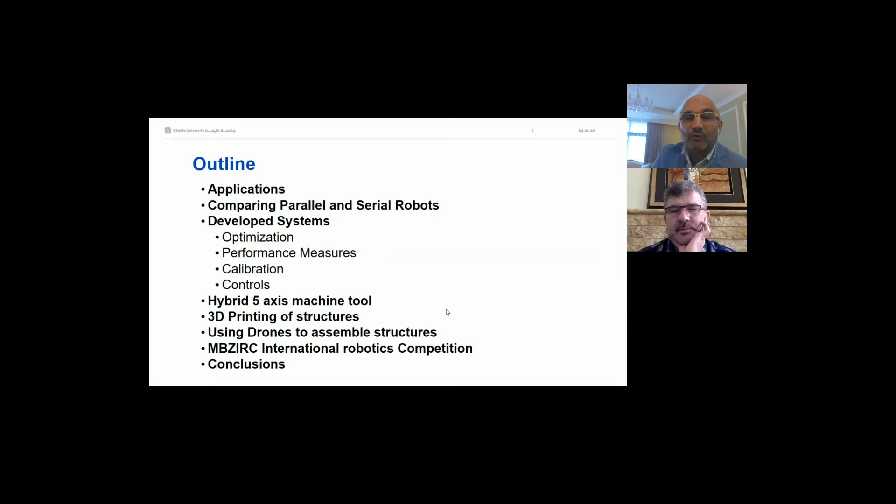The outline of the talk: I'll briefly touch on the applications of robotics, and I would like to compare the pillars of robotics, the parallel and serial robots. I'll talk about the methodology of developing robotic systems, then give a number of examples of research that my group is doing, and also a brief on the Mohammed bin Zayed International Robotics Competition, to encourage you to be part of our future competition, because it's highly popular and it could help you grow very much. Then I'll conclude with some points.

Robotics applications stem from so many fields, from surgery to logistics to security. It became very popular even as a household product, for vacuum cleaning, for example, or window cleaning. So it's being popularized at a very high rate in so many areas.

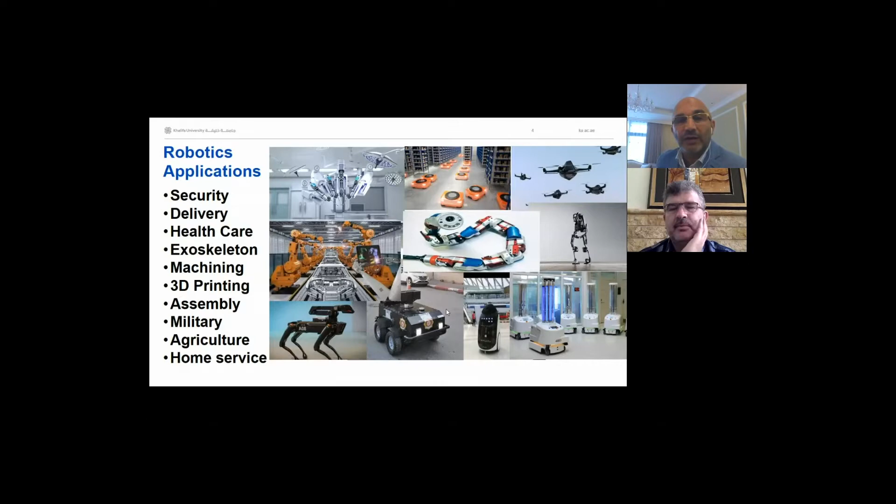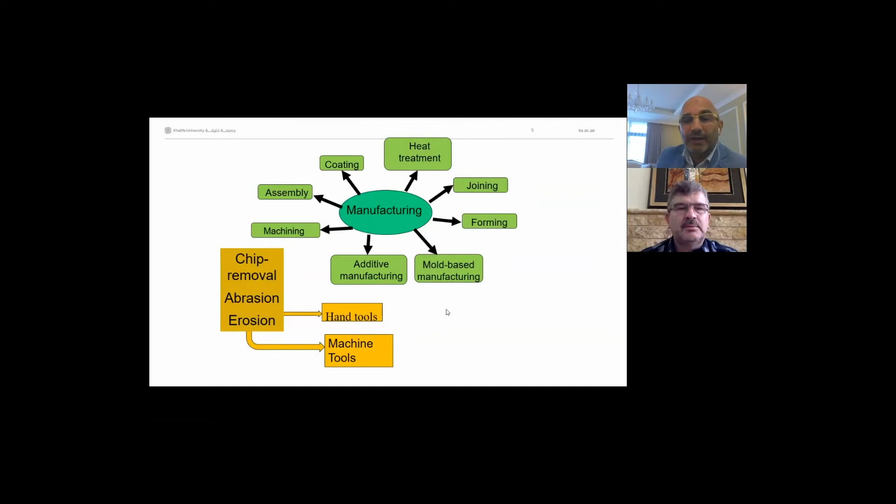One of them is industry, particularly manufacturing, which is the area I'm focusing on. In terms of manufacturing, there are a large number of applications: assembly, machining, manufacturing, etc. My work is mostly focused on developing robotic systems for machining applications, like CNC machines, computer numerically controlled machines, and additive manufacturing, where you 3D print structures. I'll show an example of that.

Many of us are familiar with the example on the left, the serial robot, where basically links are connected serially to each other. My focus is more on the system on the right, which is parallel kinematics, or a hybrid system, which combines the advantages of both.

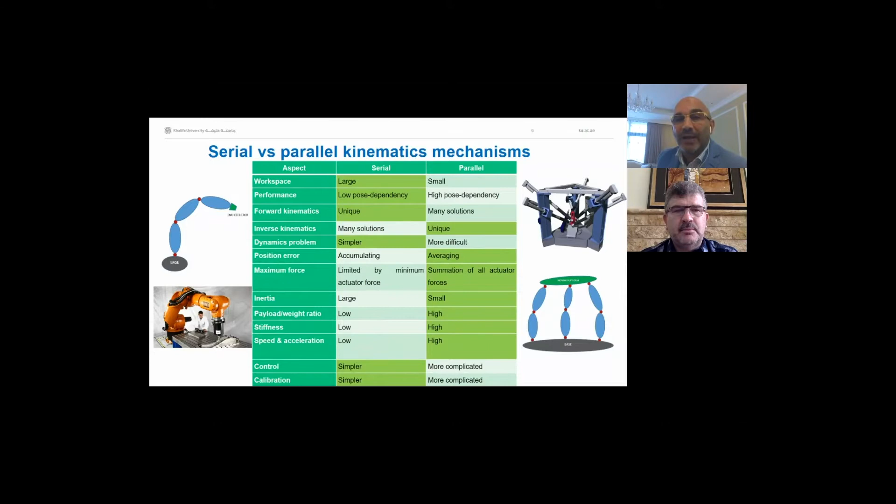Here I'm comparing the advantages and disadvantages of serial and parallel robots. For example, the workspace for serial robots, traditional robots, is quite large, while for parallel robots it's quite small. However, you have very high stiffness and very high accuracy. So the best thing is to combine parallel and serial to come up with a new breed of robotic system that marries the advantages of both.

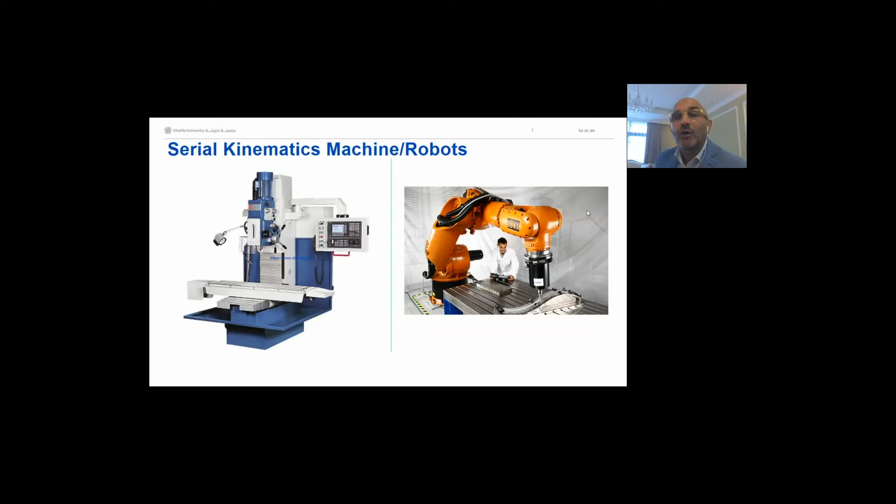This is what we are doing in many of our developments. For example, the one on the left is a serial CNC machine, the traditional CNC machine, and the one on the right is a robotic serial system, of course.

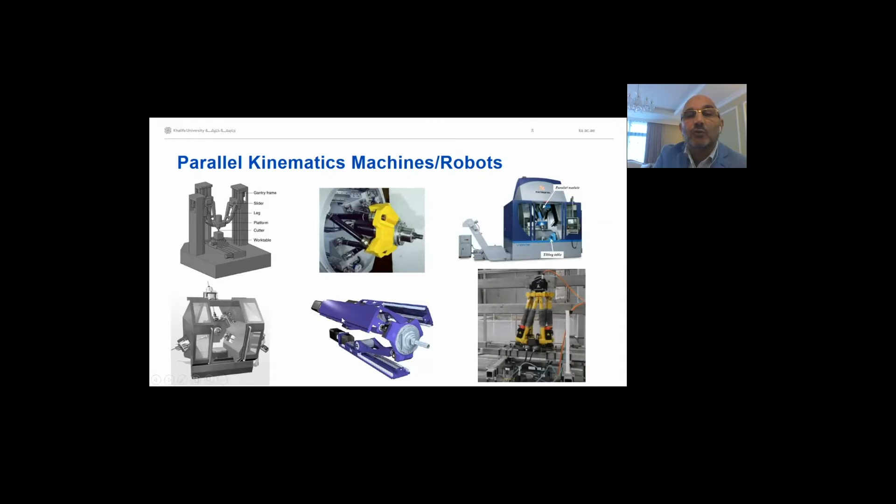Here it shows parallel kinematic robotic systems, different examples from the industry, from the hexapod, the one in the center top here, that has 6 degrees of freedom, to some spindle control here that has only 3 degrees of freedom, for example. The hybrid kinematic machines are finding more and more usage in the industry.

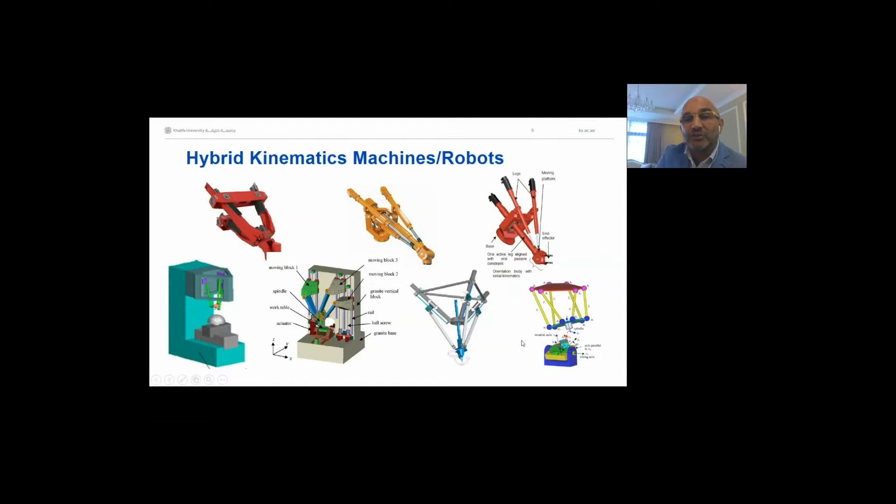The Tricept at the top here with different variations, and basically a number of hybrid kinematic machines in the bottom part of this screen.

So roadmap to conceptualize new machines, how we go about doing that. The way we do it is we synthesize the structure, determine how many degrees of freedom we need for our application, and based on that, try to identify and enumerate what types of mechanisms are there that will satisfy these degrees of freedom.

Then we formulate the pose kinematics and differential kinematics for these new concepts, based on a number of performance measures I'll show in a minute, for example workspace, stiffness, accuracy. Based on that, we'll evaluate these different competing mechanisms.

Then we'll go through an optimization process to optimize the geometric dimensions of the mechanism that we'd like to fabricate and prototype. Then we'll start the prototyping process.

And then we go through the identification of dynamic parameters, because however hard you try to make sure your dynamic parameters are accurate, it's difficult to be exact in computing the inertia or mass of the different fabricated components. So we need to resort to experimental work, such as impact hammer tests or similar tests, to identify different dynamic parameters.

Then we'll go through the phase of control design, tailoring the control algorithm based on the application, and to get the maximum out of the mechanism we are building, we need to calibrate the system in order to give you the accuracy that you anticipated.

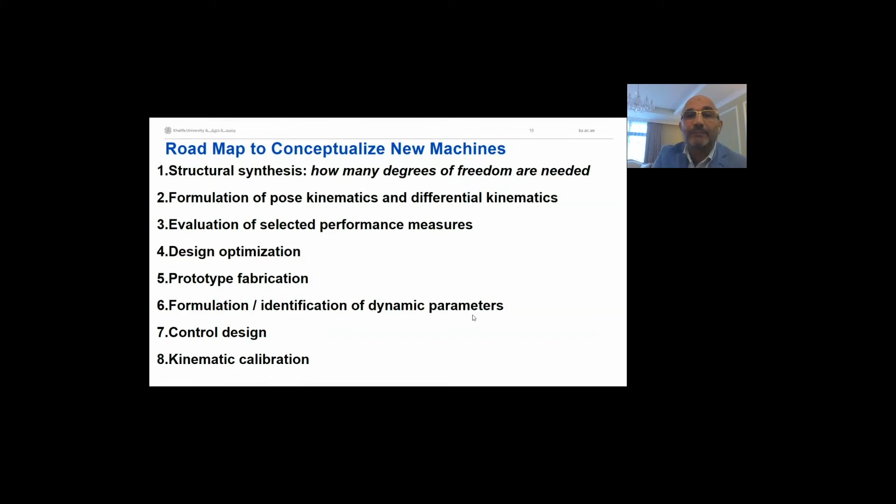The performance measures could be the accuracy of these mechanisms, repeatability, and the stiffness—especially if we are talking about machining, stiffness becomes very important. Manipulability is also key, basically the range of motions that we have for this mechanism.

Singularity avoidance is another issue. In serial robots, singularity means you lose a degree of freedom—for example, if all the links are aligned with each other, you cannot move along that aligned direction, so that's a loss of degree of freedom. However, in parallel kinematics, it's the gain of a degree of freedom. For example, if some of the legs become parallel, the whole platform will start moving without any control, so you have to ensure you don't go through singularity for such a mechanism.

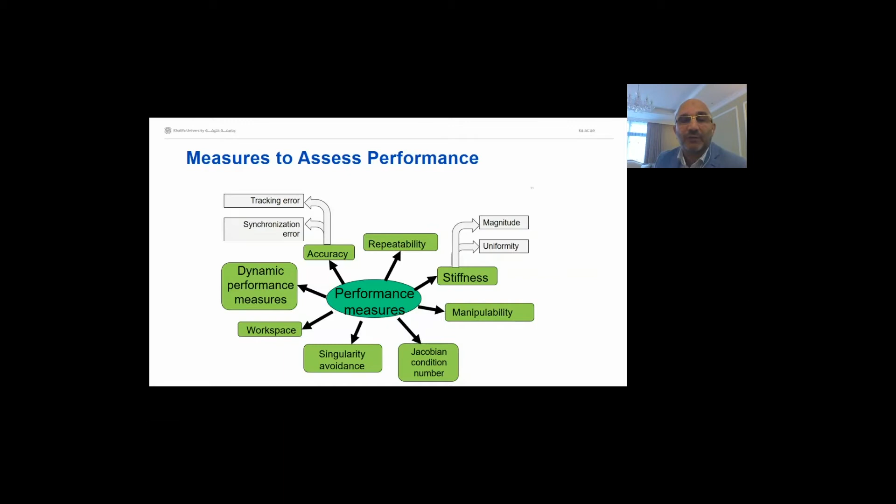Also, there are issues of sizing of the workspace, because you need to buy a machine, but it's justifiable to have a reasonably sized workspace for any machine that you have.

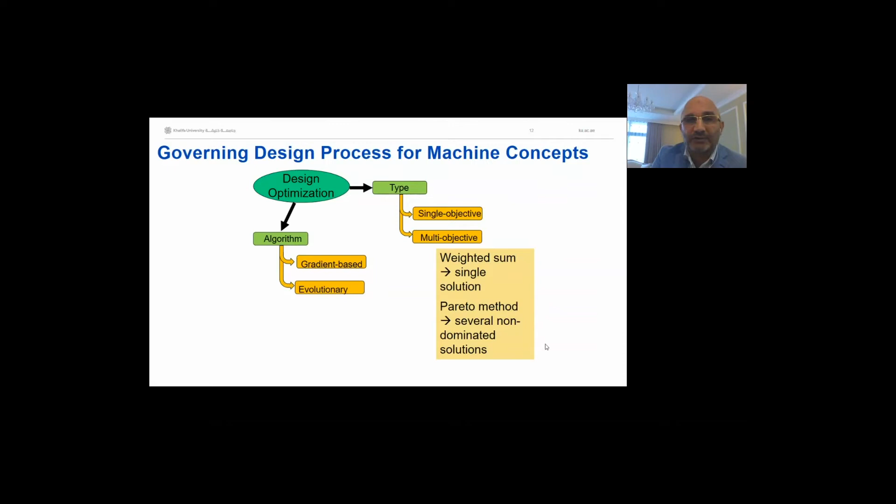Design optimization: you have to decide on the algorithms you'll be using for the optimization. For example, if I want a high or big workspace, high accuracy, and a certain number of degrees of freedom, you'll enter that through a multi-objective optimization algorithm or function in order to iterate until you find the best optimal solution that satisfies all these different objectives. This is part of the process we go through to design the systems.

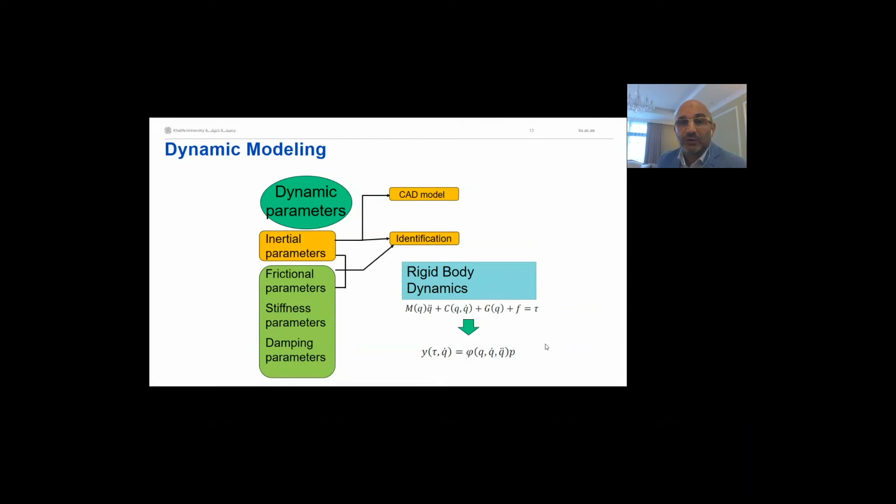Dynamic modeling: initially you'll have some rough estimate of the different parameters like inertia, mass, friction, etc. However, to exactly identify the values of these parameters, you have to go through experimental work to identify them accurately, because that will impact controls and how well you're able to manipulate your system. This is a process one has to go through.

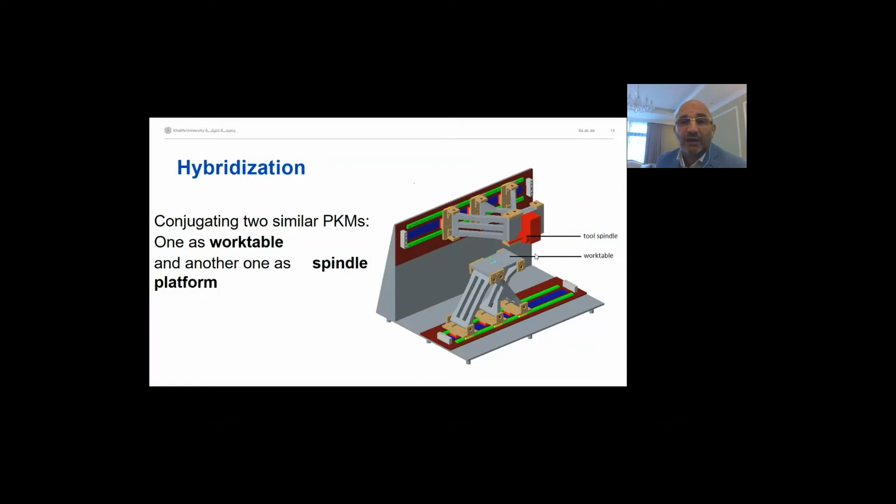So one can substitute one of these manipulators, for example, with just a 2 rotary axis table. It's highly tailorable—one can basically reconfigure it as he or she desires.

This is the machine that we built in our lab that has 5 degrees of freedom, as I said. Again, the top part carries the spindle and has 3 degrees of freedom. The lower part carries the work table that carries the workpiece that you would like to machine. And we are using in this machine...

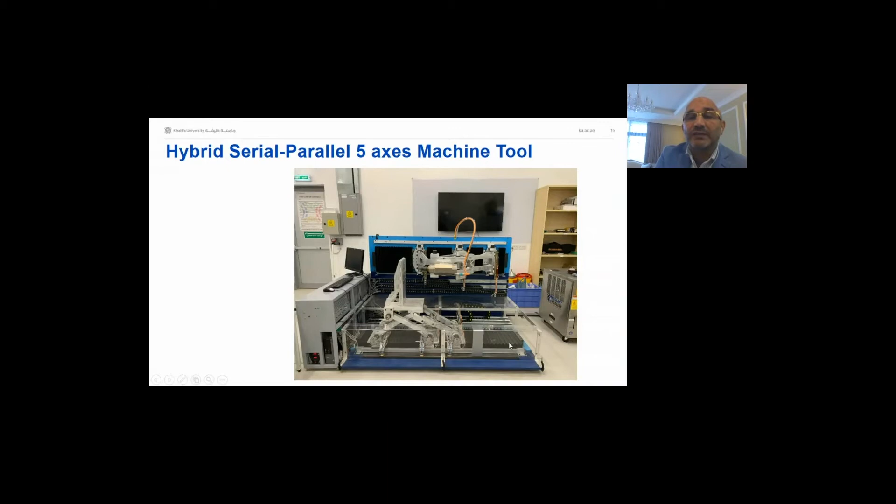Basically linear motors—the video shows the machine moving. So these are linear motors, meaning unlike motors you're used to, which are rotary motors with a spindle rotating, here the stator is flat and the rotor moves along that stator. You'll have these linear motors shown at the bottom of the machine, giving very high accuracy and direct coupling—there's no need for gearboxing.

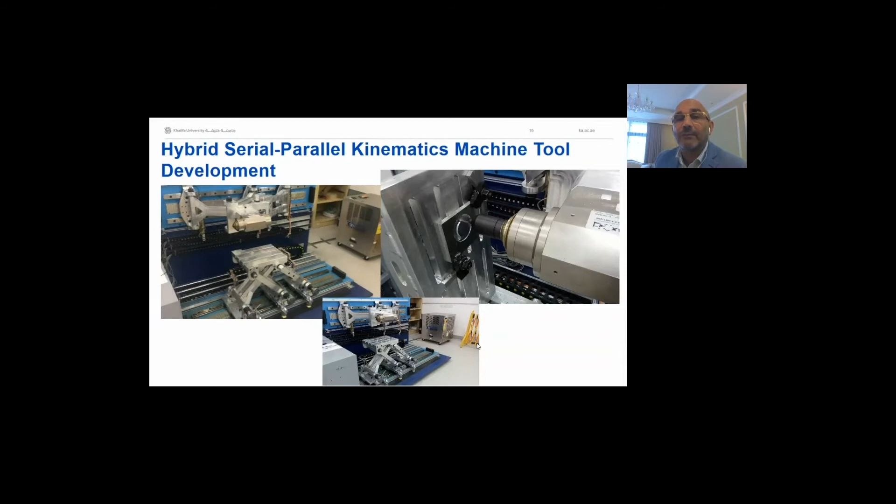But it's a bit more challenging to control, and this is part of the research work we are doing. The video on the top right shows the machine doing some machining tests on a piece, and the other video shows the different degrees of freedom that the machine is capable of doing.

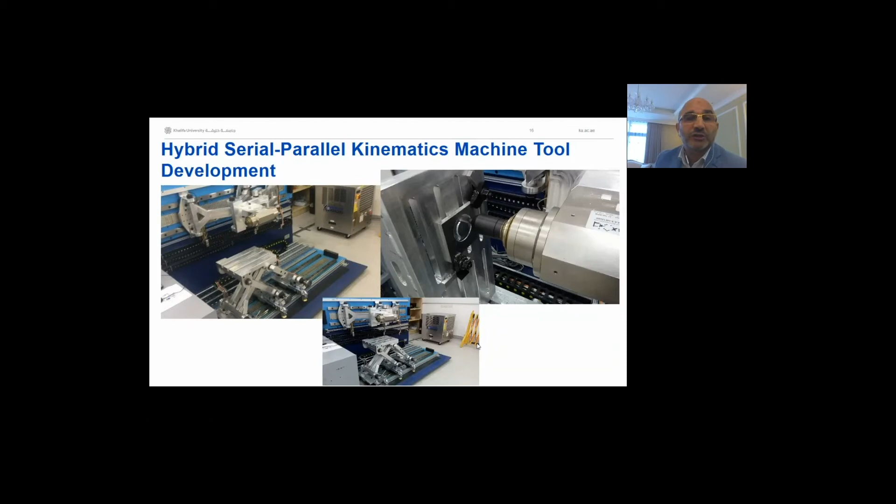So here both tables are moving together if need to. And the nice thing about this concept, you can elongate the machine as you want. It can be like 50 meters long if you want, for example, to machine aerospace parts. So you can extend it as much as you want.

After building the machine, you have to go through kinematic calibration to identify exactly, for example, if I machined one of the legs to be 300 millimeters in length, when I machine it, it came out to be 300.13 millimeters. So that difference will impact the final accuracy. The kinematic calibration role is to identify exactly these geometric values to 3 or 4 decimal places, in order to be able to estimate the location in a very accurate fashion when we are running the machine. So that's the purpose of the kinematic calibration in general.

And there are a number of methods for calibration. There is external calibration, where you resort to some external viewpoint to identify the X, Y, Z of the end effector, for example. Or you can have auto calibration, where the machine itself can go to pre-specified points and self-calibrate. So there are multiple methods, and we use in our system external calibration methods.

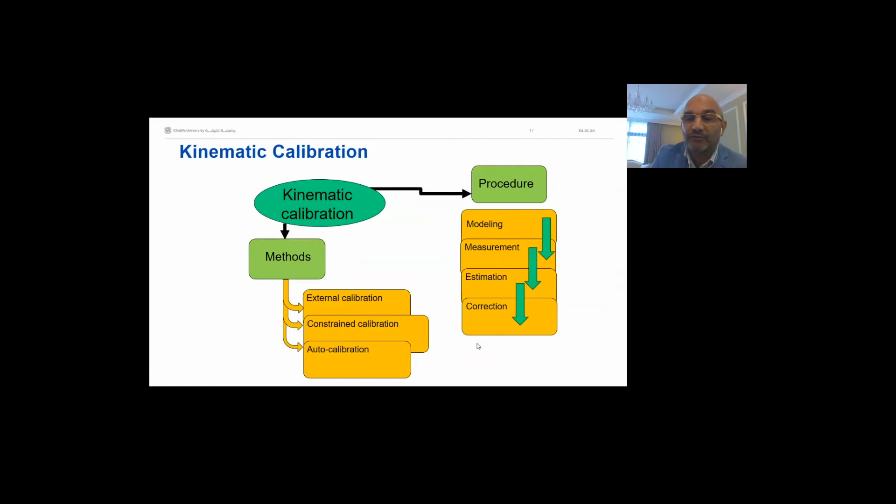Usually once you have data out of this calibration method, you'll start with the modeling of the machine, then doing these measurements, then an estimation of the unidentified values, and then if there is a need to correct, you can do a number of iterations after that.

So this is the external calibration. You'll have a laser tracker system to observe where is the end effector, so it will give you basically X, Y, Z in a very accurate fashion that you can plug into your kinematic models to identify what are the unknowns, or not completely unknown, but there are some indeterministic values associated with them.

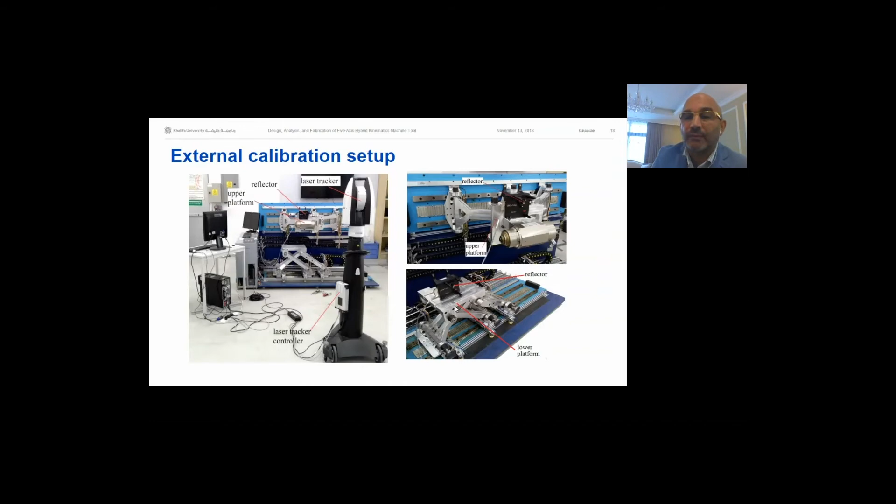Then, once you have calibrated the machine and you are confident about the kinematic values, you can go through designing certain control strategy to give you proper profiling or accurate positioning. So based on what's required, you can design a control algorithm based on that.

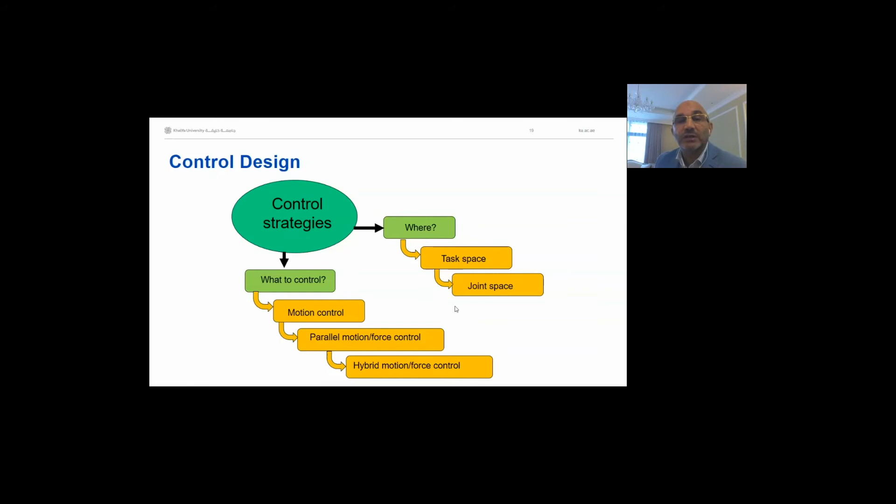Usually in our case, for example, for machining a certain part, we'd like to have the end effector position very accurate - that's X, Y, and Z. While in our case, we are controlling the position of the legs. So there is a mapping between the task space and the joint space. This is the role of a control strategy - to do this mapping and come up with the proper control signals to coordinate the motions of these different motors to give you an accurate profile or end effector positions.

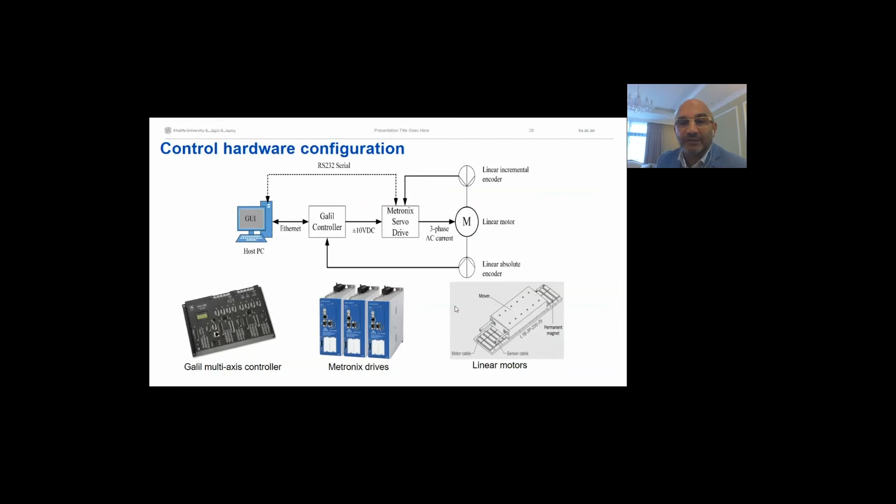Again, this is a simplified model of the different components that we use in our system. The lower right is the linear motor that we use. You have to have certain drives to drive these motors, and then you have a controller, a Galil controller in our case, to coordinate the motion between these different drives to give you the end effector positioning that you are interested in. Again, this is basically the control panel.

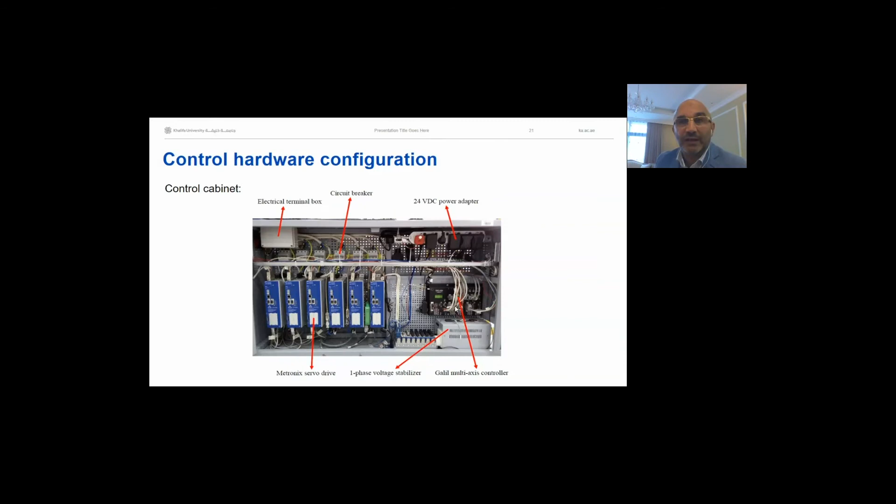And I would like to emphasize that everything that you see here was developed in our lab. So the students did this, okay? Even the machining was done in our machining lab in the university. So basically it's a complete in-house product, the machine that we saw earlier.

And of course, in order to be able to control the machine as a CNC machine, you need a graphical user interface that mimics traditional machines. And basically this also was developed for this particular machine in order to control it as simple as a traditional machine tool. Again, this was developed in our lab.

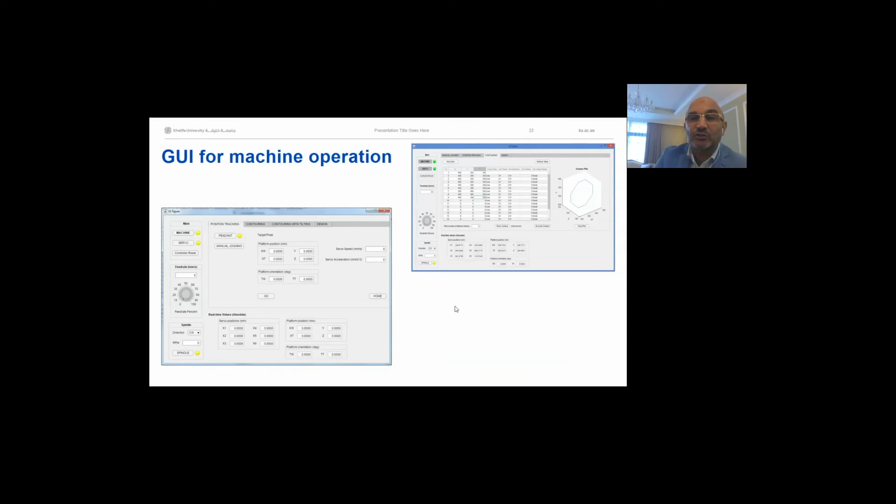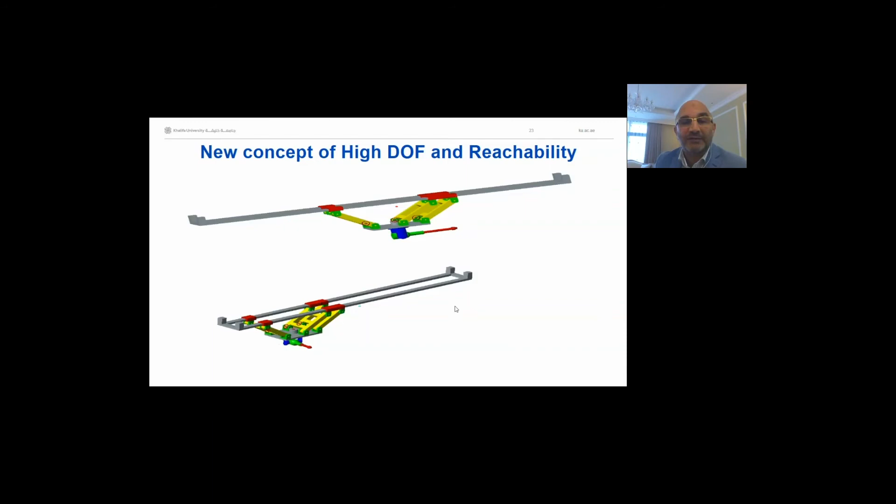Okay, we can move from that concept to something like this. So this is conceptualizing future projects, similar to what we had, but that will give you more extension and different types of degrees of freedom. And here is where reachability plays a big role. So this is an example.

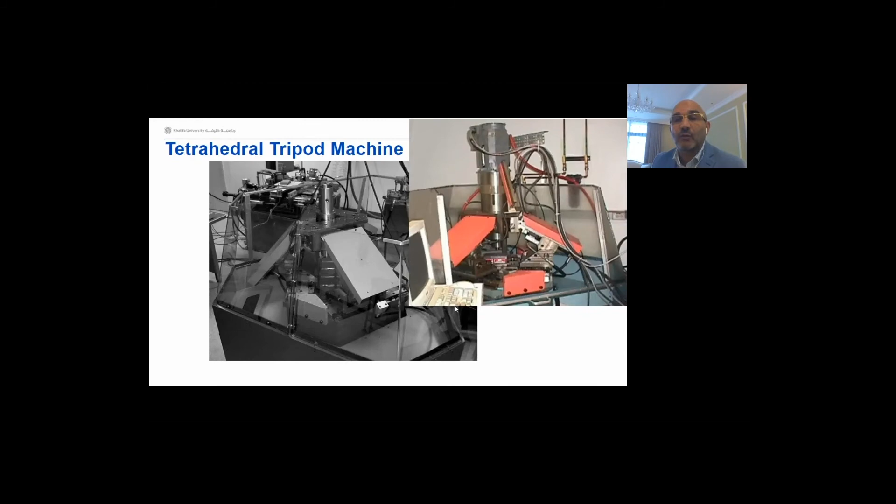Actually, this is an old machine that I developed during my PhD work at University of Illinois Urbana-Champaign, where it has basically translational degrees of freedom - X, Y, and Z. There's no rotations. And it was used actually by Oak Ridge National Lab in the States, and later it was used by Caterpillar company, which I worked for actually for a number of years. So the beauty of this - it was driven by hydraulics, and the spindle was ultrasonic, so it can drill brittle material without shattering it. So that was the distinctive part of this machine.

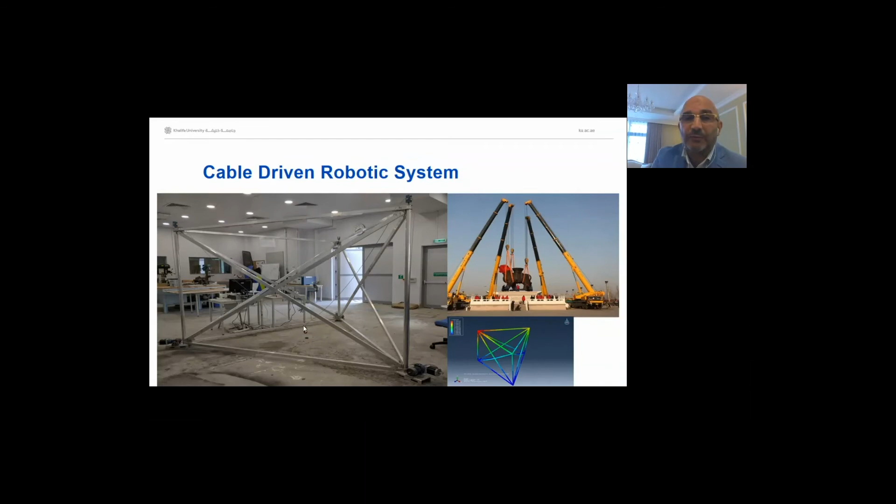This is one of the projects that a couple of students are working on, PhD and masters.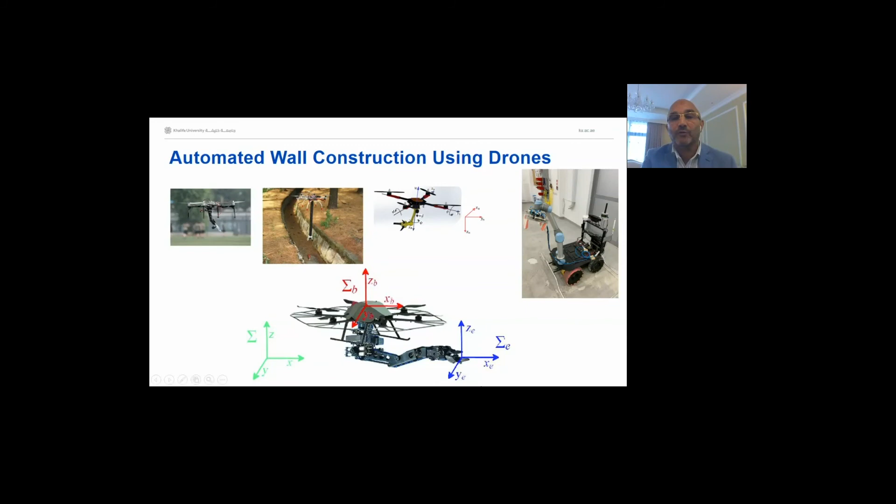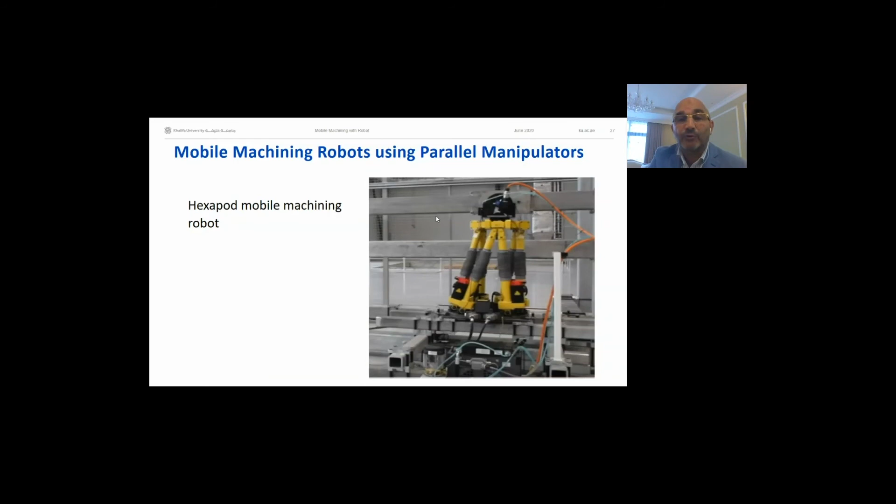This is basically a mobile robot for machining. This is not our robot, but it's being used outside, developed in Germany. We would like to develop something similar where you have a mobile system that is able to move and reconfigure itself based on the surroundings. This is a project very important to our research group right now. In this application, we would like to develop systems that enable us, instead of bringing the bridge to the machine, to have the machine going and reconfiguring itself based on the requirements over there.

Somehow the application window is not showing it.

I was going to talk about the Mohammed bin Zayed International Robotics Competition at Khalifa University. It's held every two years, and the total awards reach about $5 million. It has a number of challenges, for example 3 different challenges last time, and it attracts a good number of teams, some international, from all over the world.

I would like to encourage you to look into these seriously, because I think our students in the Arab world are capable, and if they put their mind into it, I'm sure they can compete at that international stage and make us all proud. It's also lucrative in terms of the awards. So even a few students could form a team or a company, focus on satisfying the requirements and performing well, and that could lead to pretty positive results for them in terms of income as a company.